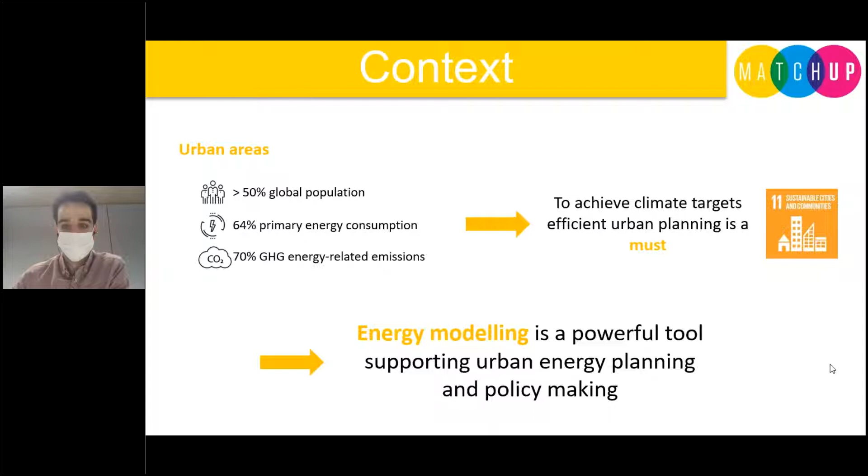To face this challenge, the efficient management of available resources and energy planning must be a must. So energy modeling arises here as a powerful tool to support energy planning and policy making. There is still a need of clear methodologies for urban energy modeling and in order to adapt current national energy models. So our methodology tries to simplify the energy modeling and scenario generation process in urban environments by combining the bottom-up and top-down approaches and by the straightforward build-up of energy scenarios.

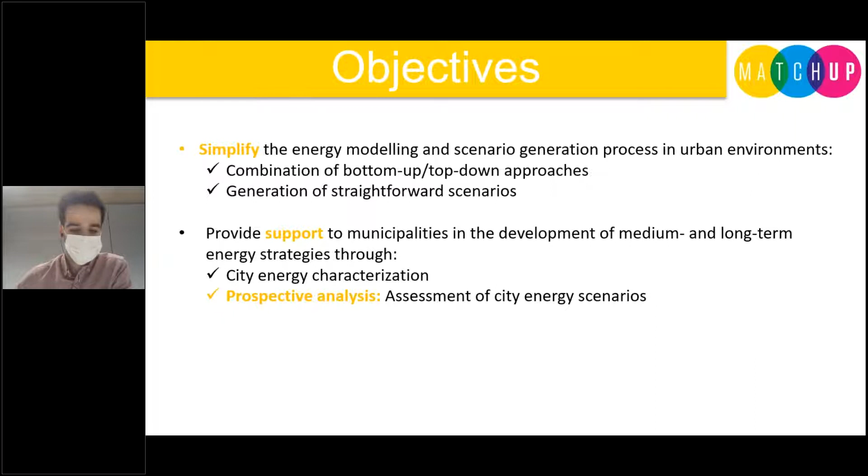So the main goal of our methodology is to provide support to the municipalities in the definition of their medium and long-term energy transition plans by providing technical support in the energy characterization of the cities and in the prospective analysis of urban energy scenarios. We should give valuable information to the city stakeholders from which they can take decisions based on the results from these scenarios.

So our modeling process is embedded in a broader methodology for advanced integrated urban energy planning, which has been developed in other smart city projects. The methodology consists of 4 main phases, which go from the energy characterization of the city to the impact assessment of energy scenarios. The first phase starts with the energy characterization of the end-use sectors of the city, with a special focus on the energy characterization of the building stock model using georeferenced data.

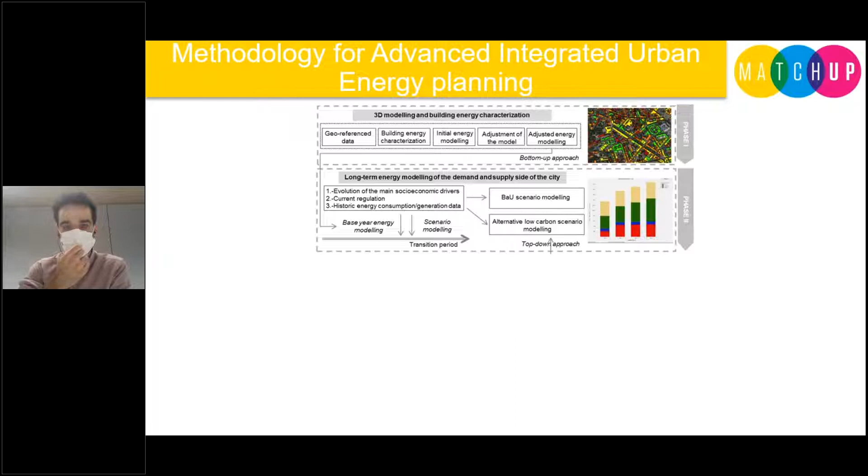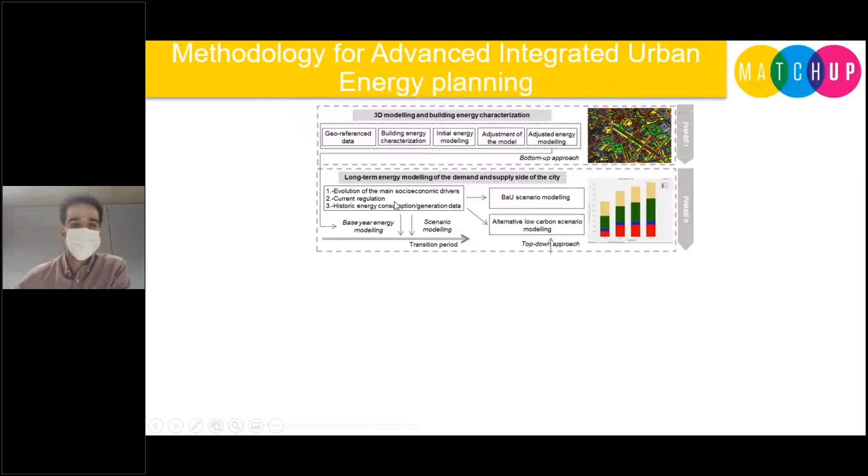The second phase deals with the energy modeling of urban energy systems and the generation of energy scenarios, which are constructed based on the evolution of the main socioeconomic drivers and implementation of energy interventions. The techno-economic analysis of these interventions is assessed in the third step of the methodology, where the supply chain of this intervention is assessed.

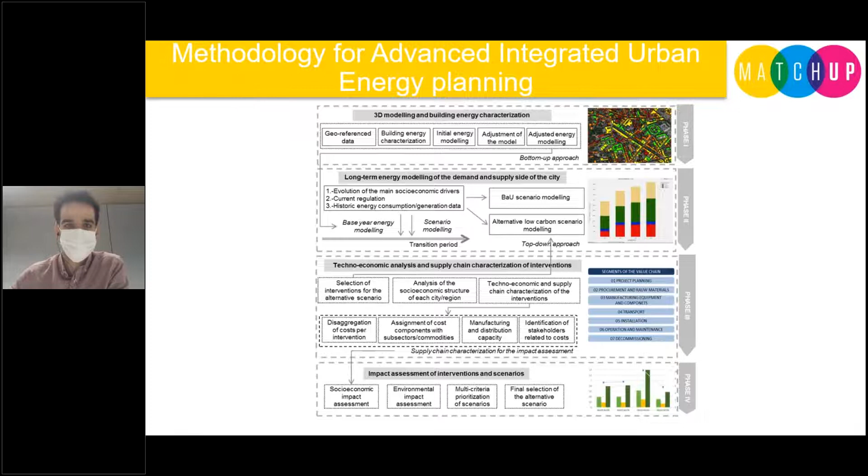The methodology ends with step 4, in which the scenarios are assessed based on multi-criteria analysis, so the local stakeholders can decide which scenario best fits its necessities, its priorities. So I will focus on the first 2 steps of the methodology, which are focused on the energy modeling and scenario generation.

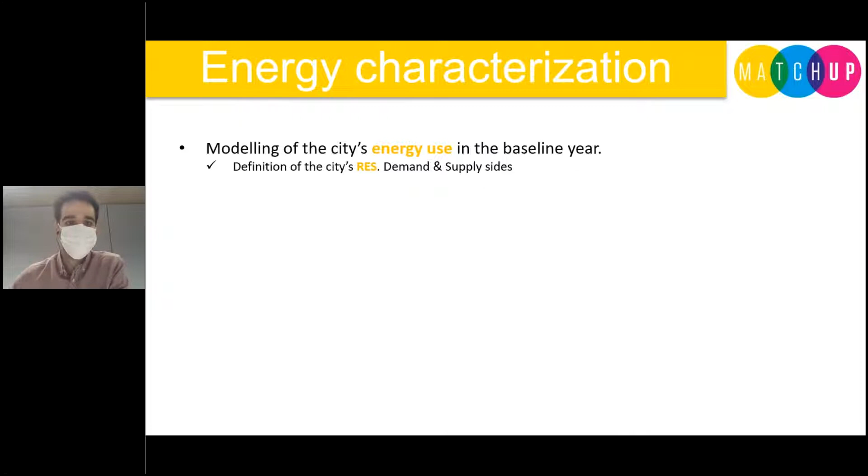So our modeling process starts with the energy characterization and energy modeling of the city's energy use and end-use sectors. In this first step, we define the city's reference energy systems with both demand and supply sides. We integrate both top-down and bottom-up data. The first one is issued from city databases or energy and emission inventories, for example, from SECAP inventories, or we also use aggregated real consumption data from energy facilities.

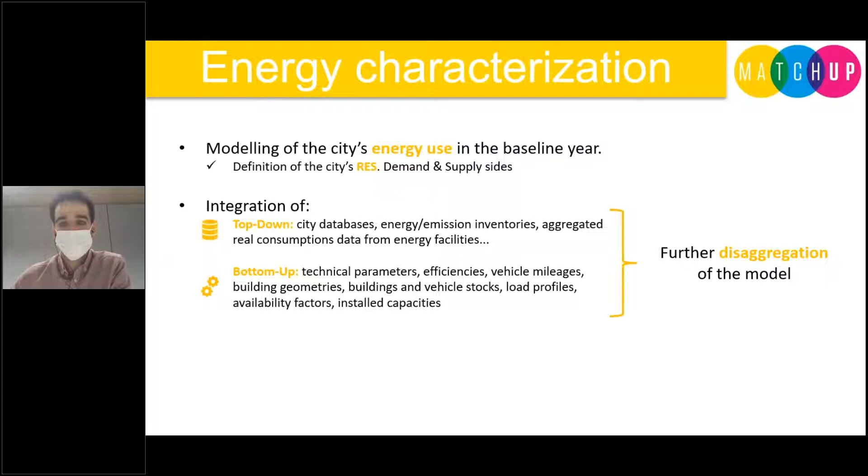Bottom-up data is more focused on micro-level data, more technical data such as efficiencies, vehicle mileage, building geometries or construction periods, building and vehicle stocks, etc. The combination of both types of data allows us to further disaggregate our model. In the case of the building stock characterization, we make use of the ENERKAD model, which is a GIS-based model which simulates the building stock energy demand based on cadastral data.

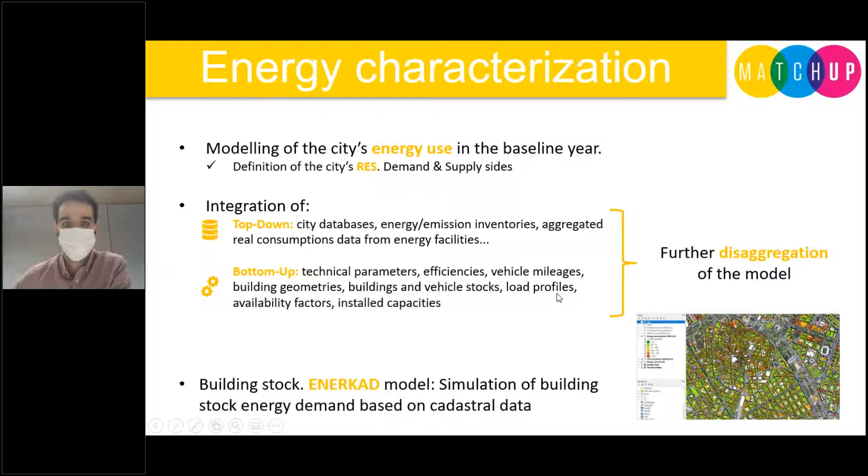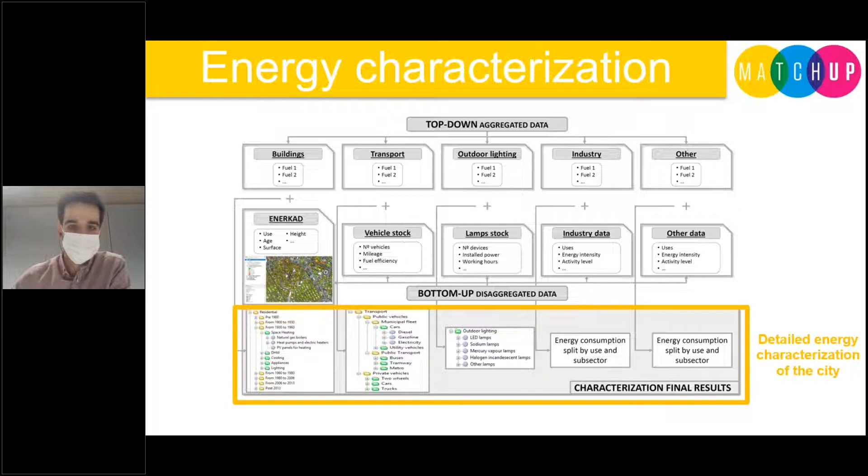So in this figure, you can see a short explanation of how we integrate top-down aggregated data, mainly fuel aggregated data by sector, normally from SECAPs, and we combine this data with more technical parameters such as the use, age, or height of the buildings, stock of vehicles, their fuel efficiency, mileage, etc., in order to get a more detailed characterization of the city and also more detailed results.

So once the energy baseline of the city is set up, we start with the modeling of the city's energy scenarios. Our first question could be what these scenarios are intended for. The scenarios provide a set of alternative contexts for exploring different ways that the future may unfold. Again, in these scenarios, we combine top-down and bottom-up data to model the different pathways that the city can face. The energy demand and generation of the city for the next decades are calculated using a top-down approach based on the analysis of the city's historical development and the evaluation of committed plans and current regulation.

We also establish some correlations between the energy consumption and socioeconomic drivers like population, GDP, added value, and so on. But I must say that in the case of cities, this is a hard task because this kind of data is normally lacking, so we usually end up relying on assumptions. On the other hand, in the bottom-up approach, we try to model the energy interventions by implementing efficiency improvements, for example, activity reduction or changes in the stocks of buildings, vehicles, and energy devices like boilers and so on.

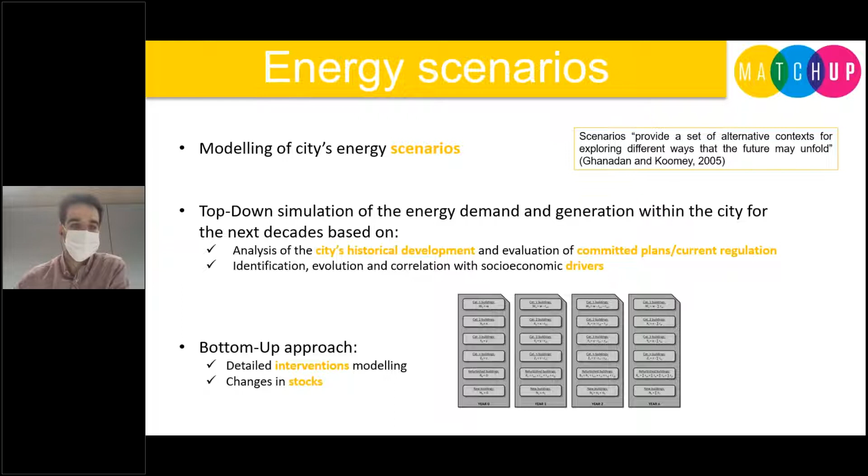In these scenarios, we include both the evolution of the demand side and supply side of the city. Two types of scenarios are built. The first one, the business as usual scenario, displays a conservative view of the evolution of the city system, where former trends are kept and already committed measures are included. This is our benchmark scenario against which the results from the alternative scenarios are compared.

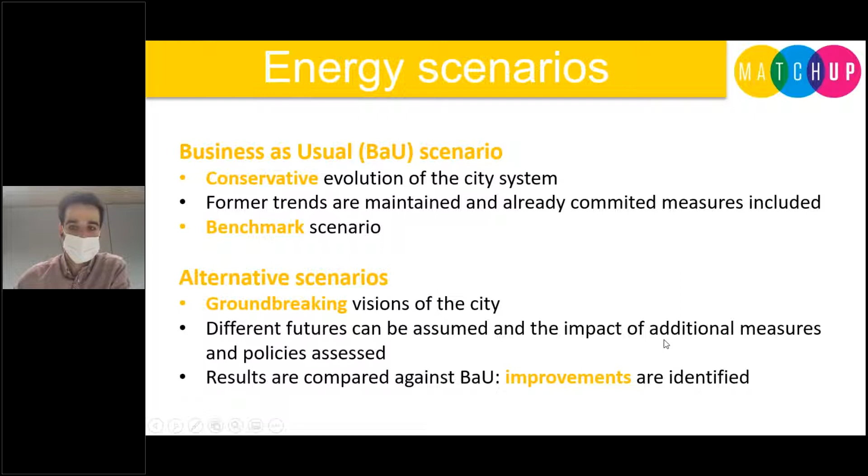The alternative scenarios, on the other hand, present more groundbreaking or innovative visions of the city, where different futures can be assumed and the impact of additional measures and policies can be assessed. The results of the additional measures in these scenarios are compared against the BAU results, providing a measure of the improvements or savings that will be achieved by the city when implementing these additional measures or interventions. This methodology has been used in the MAtchUp project.

I will show now 3 brief examples from the cities of Valencia, Dresden, and Kerava of the use that has been given to these scenarios. In the 3 cases, the scenarios supported the decision making regarding the update of the city's climate targets. In the city of Valencia, for example, the alternative scenario presented the expected evolution of the city's new energy strategy roadmap.

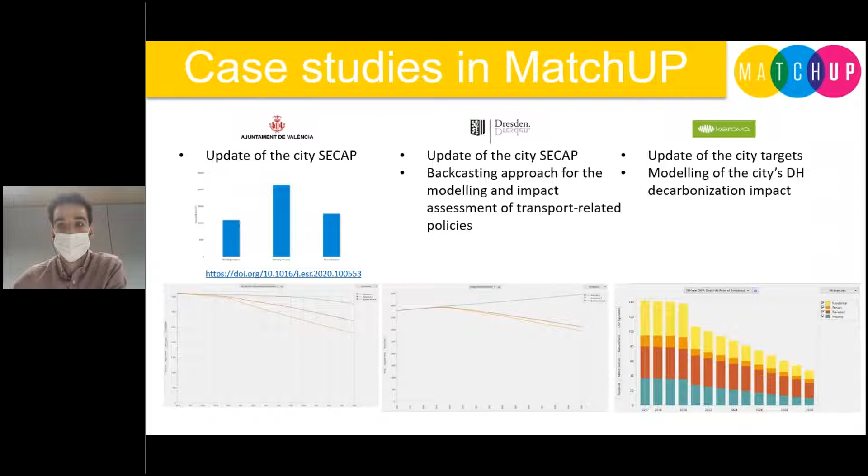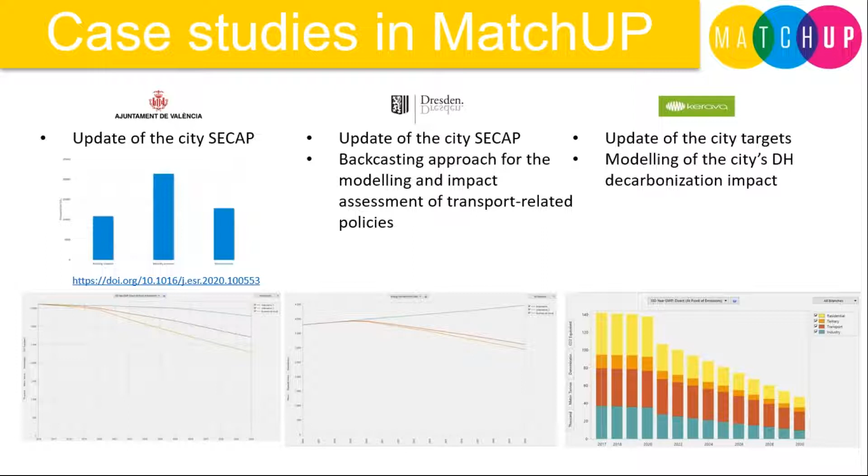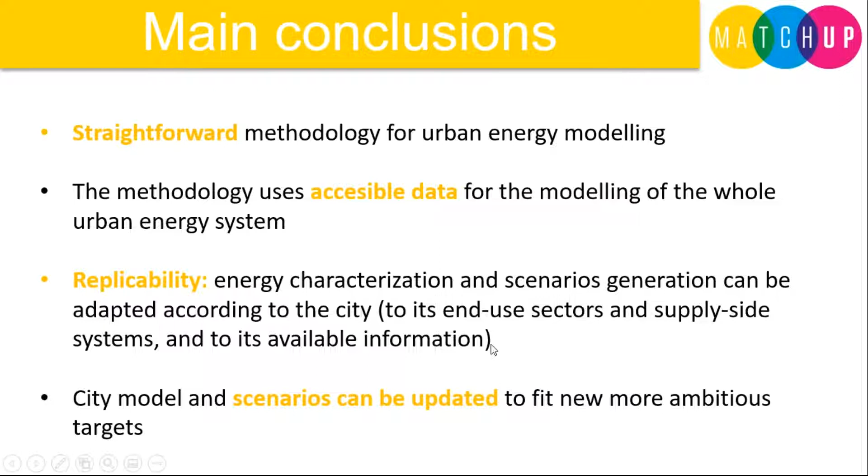And finally, yes, the city stakeholders can take decisions based on these scenarios and generated city visions. Also, these scenarios can help in the setup of ambitious but also realistic targets. And finally, the development of these scenarios supports the decarbonization and transformation of urban areas into sustainable systems through the efficient management of available resources.

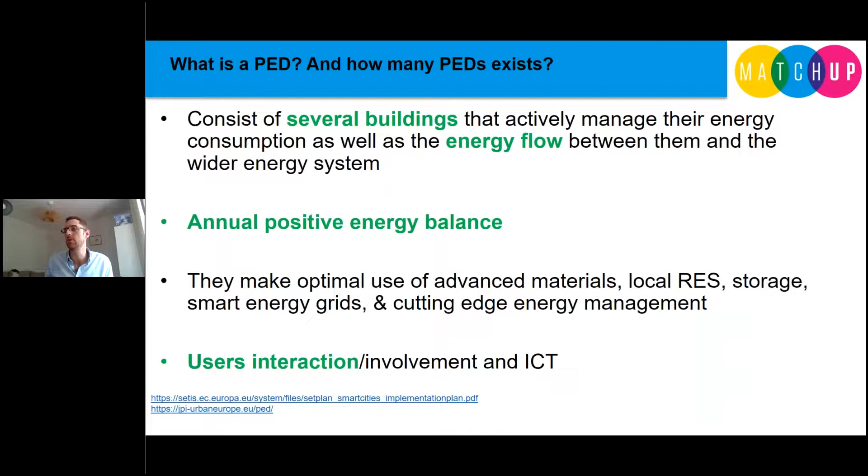Then if we look at other definitions, like for instance the one from JPI or EERA, they go a bit more into detail on the requirements. So the PED should rely only on renewable energy, which makes sense. It should also focus first on energy efficiency, so not just on the production side, but also on the demand side, trying to optimize and decrease demand using energy efficiency.

And then another keyword, energy flexibility. So the provision of energy flexibility as a service as well, since there is the connection with the district and there are additional functionalities that buildings can offer with their sensors, their intelligence and storage. So flexibility comes into play. This goes hand in hand with the adoption of renewable energy, because with the fluctuation of generation, focusing on flexibility is a must to avoid mismatch.

All in all, how many PEDs exist? That's quite a debate among different initiatives on PEDs worldwide and European-wide. For instance, in EERA, the European Energy Research Alliance, this is something that we have strongly debated, and we came up with 3 types of PEDs: dynamic, autonomous, and virtual. What's the difference between them?

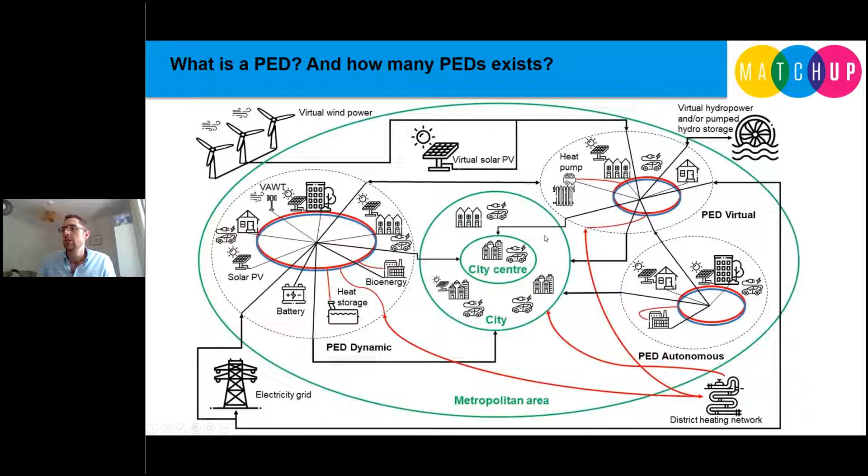So pros and cons of these 3 PED typologies. The autonomous, of course, you go for self-sufficiency, but then more storage capacity may be needed for covering your demands. It's quite problematic for zones with high seasonality, so variation during the seasons. The dynamic PED is more flexible regarding system control, since you can use the grid as an ideal storage. And indeed, it does not require much storage capacity. And of course, it's dependent on external electricity or energy generation.

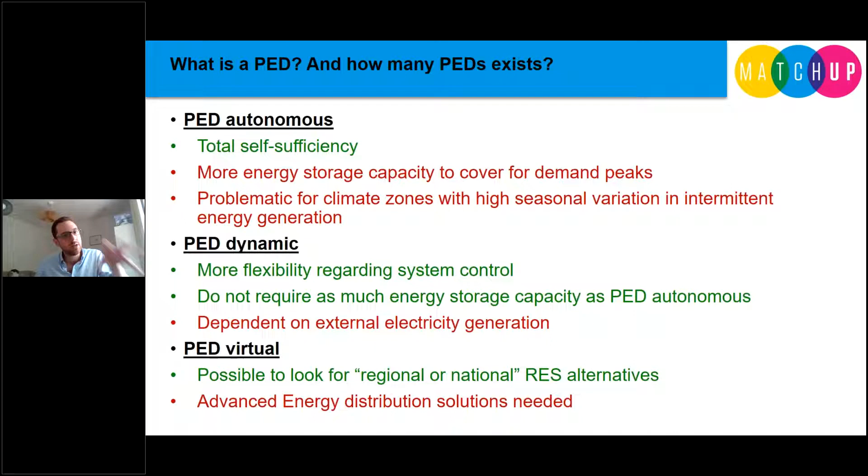The virtual one, here you need to optimize your PED or the selection of renewable energy, looking also at what can be offered at the regional or national scale, which gives you more room to maneuver and to reach the cost optimal in a different way than the other PEDs. In this regard, since you rely so much on renewable energy outside your district, an advanced energy distribution solution is needed, especially to create an evidence-based transaction system for energy transactions that occur between buildings inside the district and renewable energy outside.

But then to design a PED, given this very brief knowledge on the different PEDs, what are the aspects that you should look into? Well, first of all, of course, is the climatic condition and the type of building, which will more or less define the building demand. Some of these, by the climate and the location, might be a good advantage or not for different PEDs. Population is another parameter. If you have a very dense area, then most probably the density of the demand will also be quite high in the district. So the size of the renewable energy system, the generation inside the district, is of course affected by that. Then there is the capital.

These are usually expensive, especially if you go for an autonomous one, and I will show what's the variation between them in a moment. So the GDP is a good indication to look at, because the richer the area, the more you can afford that. On the other hand, electricity price, or energy price in general, is another thing to look at. The more expensive the energy, the more sense it makes to have a kind of advanced PED.

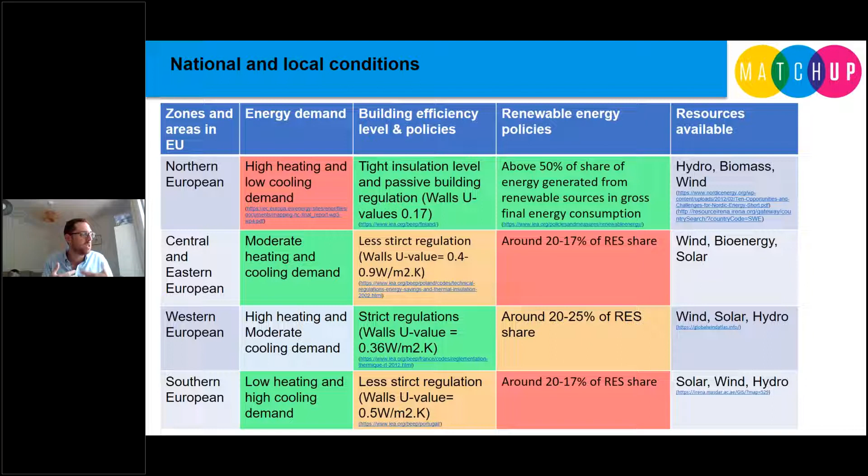Another thing to look at is, of course, the energy efficiency side. So the energy demand, the level of insulation, the level of demand for the buildings, and also the policies: if the country has specific policies when it comes to renewables, which of course facilitate PED implementation.

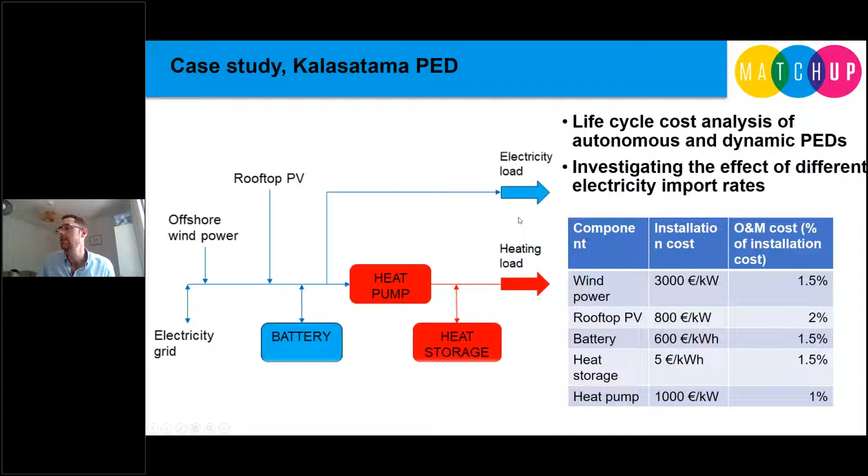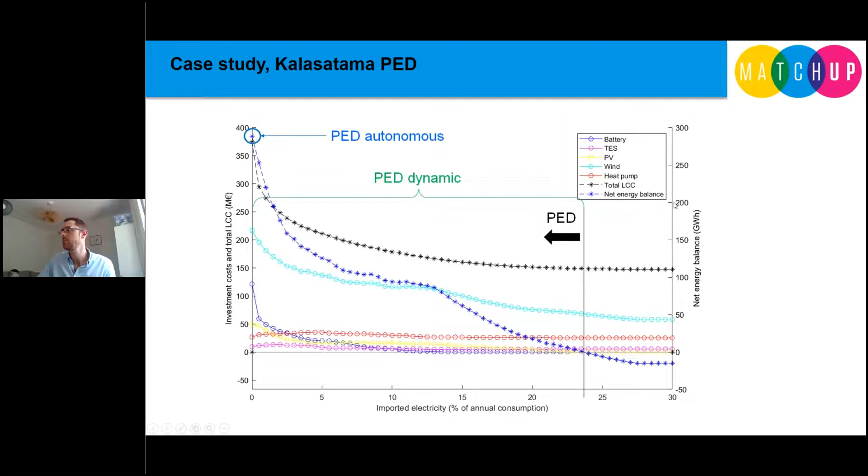So the PED concept can actually vary depending on the location, as we saw, so different parameters play and give you the boundary conditions to work with. Regulation is also something you have to look into, and you have to look into economics and resources available in the surrounding of the city, and land use is also another point.

A holistic approach is anyhow needed. First of all, you need to understand the resources available within the cities and in the region as well, what technologies you can actually use, and start to have an understanding of what the technical concept is there.

And finally, once the concept is endorsed, regulation and policy at the country level can also endorse it. So you may choose different technologies or different solutions because the regulation actually directs you to different settings.

When it comes to development, one thing is technical development, which I showed you with the optimization exercise. But at some point, things become very practical. You may select the ideal solutions by looking at different parameters like climatic parameters, economics, and availability of sources and so forth. But in the end, you need to look at the local ecosystem, because at some point you would need maintenance, you would need an ecosystem that's able to create services on top of these technologies as well, to get revenues and so forth. So you would need quite a lively local innovation ecosystem.

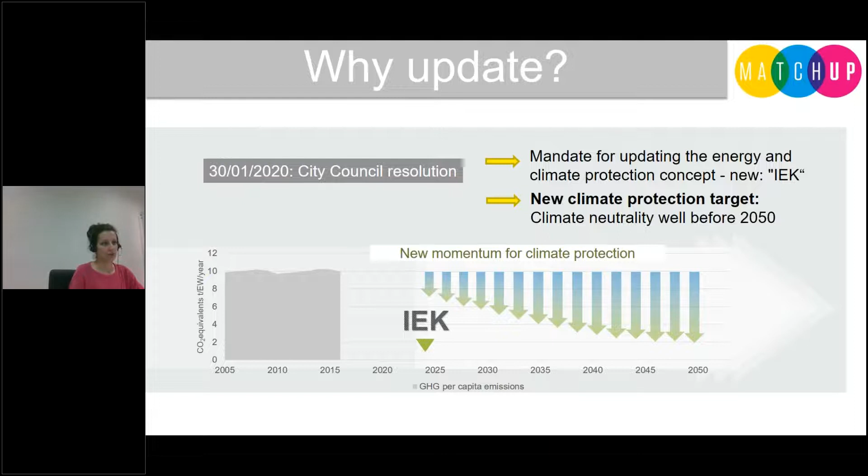The Climate Protection Unit has been preparing this decision to update the concept for almost 3 years. It was also a finding in the MAtchUp project. Therefore, we were able to prepare the tender just a few weeks after the City Council's decision, which would take more time in another case.

Since we needed the support of a third party for the legally compliant awarding of the services to a contractor, the process for commissioning took almost a year. Since we did not know whether the threshold values would be exceeded in the tender, we conducted a European-wide tender from the very beginning. Although a European procurement process is complicated anyway, the Corona pandemic added additional stumbling blocks for us. We had the first digital tendering interview with our city with 4 potential contractors. And in December 2020, we signed the contract with our external partners.

On the next slide, you can see the core elements to be considered in the update. We are looking not only for a concept, but above all for an action plan to which many partners feel committed. Since climate protection cannot be achieved by one municipality alone, we have planned a comprehensive participation process that will help us gain many allies to implement the climate protection goals. Of course, we need to show a scenario how to achieve the climate protection target for 2030 and before 2050.

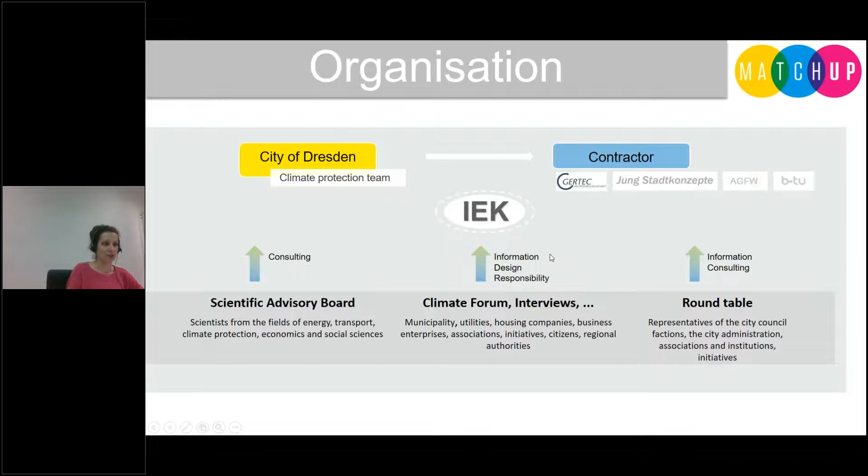Alongside the conceptual work, we have planned a participation process also for the public. The first steps are interviews with different stakeholders and their view on climate protection measures and projects. These discussions will help us to define obstacles and find ways to overcome those in the future.

Also, the public will be involved with 2 climate forums, in summer and also at the beginning of next year. That was called implementation, so we really want to step from the concept phase to a real implementation of measures.